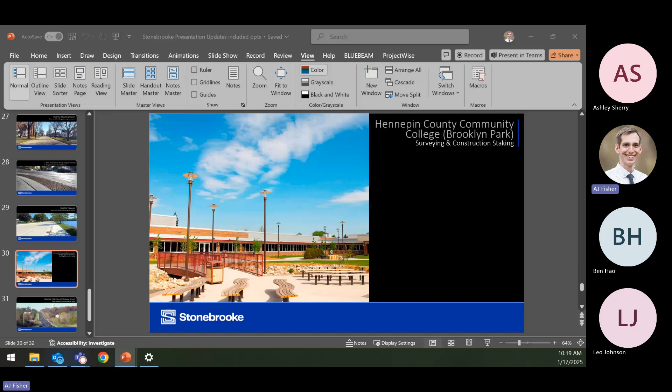We'll see if I can juggle this. All right, Nate Kabat is the Community Development Director for the City of Chaska. He has worked for the city for 9 years. Nate holds a master's degree in urban and regional planning from the University of Iowa and is AICP certified. Nate enjoys ice cream and tossing the tennis ball when his dog actually cooperates in a game of fetch.

Bob Meurer is a senior transportation engineer at Bolton and Menk. He has worked there for 4 years. His career is founded in multifaceted, complex construction projects, but has lately been managing projects through design and construction all over the metro area. Bob enjoys long books, long trails, and short lines at coffee shops.

Jake Bongard is a principal transportation engineer with Bolton and Menk. He began his career in 2009 and works on a variety of projects ranging from high-level planning studies to in-depth final design. Jake holds a Bachelor of Science in Civil Engineering from the University of North Dakota. Jake enjoys building forts with his kids and taking annual trips to the Boundary Waters.

Great, if you guys want to come up, you can take it away.

This mic's for the Teams meeting and this mic for... this is Teams, this is the room. Oh, I'm doing both. Yep.

Okay, is this working? Okay, so I'm Nate Kabat. I'm the Community Development Director for the City of Chaska. And I'll get us kicked off.

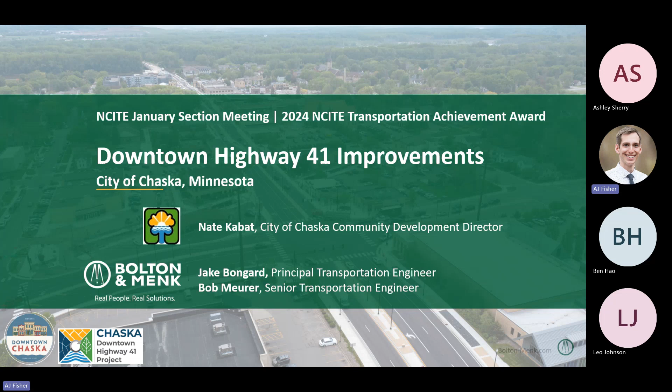So just to preview some of the things we're going to be discussing today, we'll go through the history of this project, the city's role and leadership, some issues and problems, and solutions. Bob has trained me through this project that for every problem there is a solution. We can be confident in that. We'll go through the funding, construction, and project accomplishments.

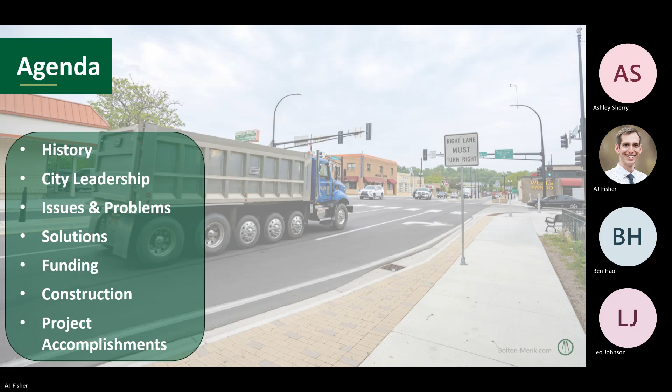I'll be here for the first section, and then I'll toss it over to these guys. So just to get you oriented to Chaska a little bit, there's quite a bit of history in the city. I don't know if you've ever been there before, but if you have, you would know that we have a pretty historic downtown. You can kind of follow transportation history and how that's developed along the Minnesota River.

Chaska was once a stop on the Minnesota River, serving as a port for grain primarily and other materials that need to happen. We're sort of a frontier outpost at that point, right? Carver County was organized in 1855. The first railroad bridge over the Minnesota was in St. Peter in 1869 - St. Peter's a little bit south of Chaska. City of Chaska was incorporated in 1891.

And then you can see here, there's some photos of 41 and how that has looked differently over the years. In the original plat for Chaska, 41 would have been Chestnut Street. There would have been no river crossing at that point in time, and it would have been a city street, right? And so that city street over time has become a MnDOT State Highway with a river crossing, which is a critical route in the connections that it serves, north-south, between Scott County and Carver County.

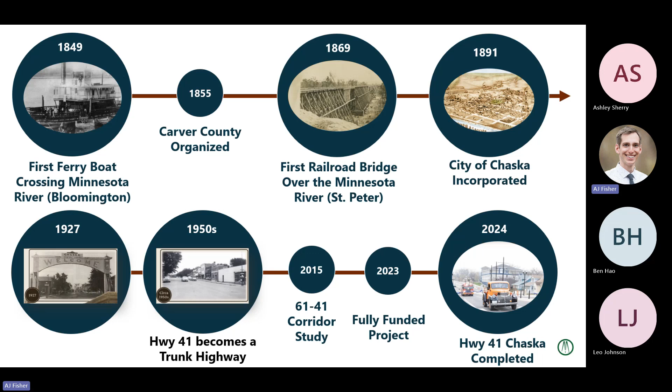So here you see the location of Chaska as it pertains to the metro. Yellow dot is showing where that is. You can see the crossing of 41 connects 169 up to 212 and Trunk Highway 5 and ultimately Trunk Highway 7.

And here, in Chaska, we talk about the 3 Gs that travel on Highway 41 frequently: grain, garbage, and gravel. On the south side of the river, you've got a DEMCON site where there's a lot of garbage going. You've also got gravel mines on the south side of the river that are coming northward to feed all the development going on. And then you've got the grain trying to access from farm locations in western Carver County and beyond over to the ports in Shakopee, where they thereby go to the world, right?

So you can see in Chaska, this is zoomed in to our downtown. You get the historic, traditional grid street system that was developed with the original plat. You've got Highway 41 that goes through the heart of downtown, which was really originally the main street of Chaska.

So you can begin to see some of that tension, right? MnDOT's got interest in getting vehicles through quickly and efficiently. We want people to come and get out of their cars and walk around and enjoy our downtown. And so you've got that kind of interesting

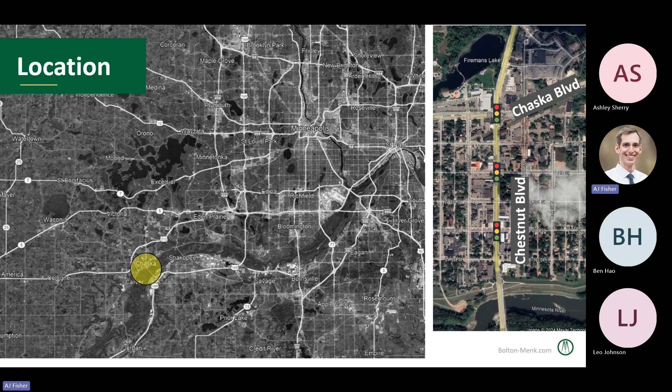But that's right off of 41. There's three burial mounds in that site, so it is by state statute a cemetery. And then on top of that, now we've built what we would call our historic park or city square. So there's all that kind of layering that's going on in downtown.

Downtown Chaska overview, I've given you a little bit of that already. I think some things to note, in addition to what I've mentioned, in 2012 there was a downtown master plan that was done. So downtown Chaska was built around the brick industry.

There's a lot of bricks actually in downtown Minneapolis, and also the State Capitol's foundation is built out of Chaska brick. And so that was clay that got mined out of Chaska. It was very industrial. Eventually that brick industry dried up.

And so, over the last few decades, we've been working on revamping and rebuilding and redeveloping and all that kind of thing. And what is that vision? There's a lot of scattered kind of work going on, and I think in the right direction.

But come 2012, people thought, you know what, maybe we better be a little bit more coordinated about this. So there was work that went into that, came up with a downtown master plan, identified some key investment areas and things that we wanted to see happen. And Highway 41, the spine of downtown, was definitely identified in that plan.

Trunk Highway 41 at the time, before this construction project happened, was two lanes going each way, no dedicated turn lanes. There's a lot of traffic hazards that came out of that. Not a great experience for pedestrians.

And so we recognized that Chaska needs to really take a lead here, put a priority on improvements to Highway 41, because everything kind of radiates out from that. So that was the 2012 Downtown Master Plan.

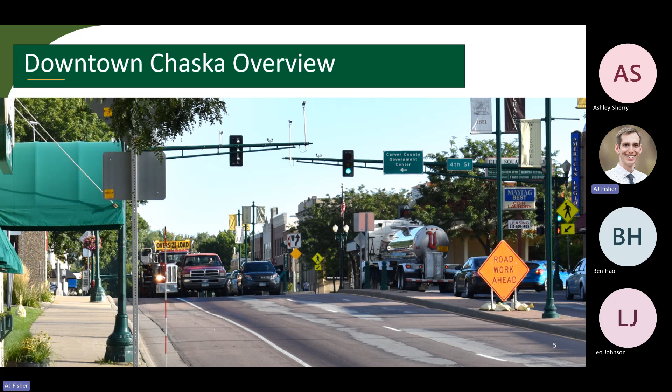So goals and perspectives. This is coming out of that downtown master plan and also some of the planning work that was done at the onset, led by Bolton and Menk: preserve and enrich the ambiance of historic downtown Chaska, provide a comprehensive network of non-motorized transportation, safely accommodate all users, so not just the traffic, but also the pedestrians.

Provide efficient and reliable vehicle mobility, so that's getting at the need for actually dedicated turn lanes. Provide infrastructure improvements compatible with the natural and human environment. Again, that's getting back towards, can we make this more pedestrian friendly? And develop a financially responsible implementation plan, which gets at how do we get other people to help pay for it.

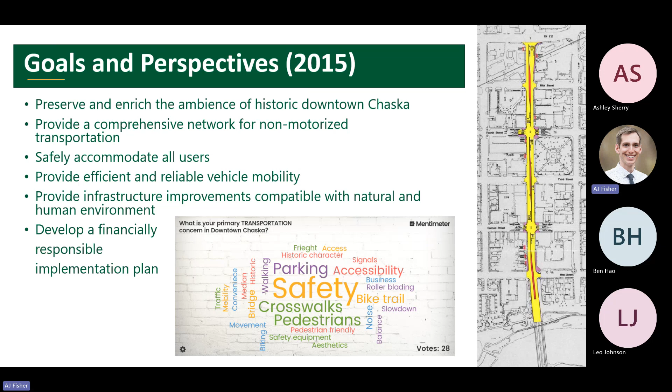So city leadership, I think it's fair to say that the city of Chaska took a very strong leadership role in this, definitely with the partnership of Carver County and MnDOT at our side. But to credit those folks, recognizing that the goals at hand here are really driven by the city and the local experience and what we're wanting to see with their downtown.

I won't say it was always easy. There were some very contentious meetings that occurred as we're trying to align the various purposes of a city versus MnDOT and the county in between. Everyone's got their own goals and strategies and needs that need to be met. But we were able to work through that.

And then even through implementation, and Bob's going to get into some of that, having the city at the lead of that with MnDOT and Carver County as partners, I think went a long way in being a little bit more boots on the ground and understanding those connections to the business community and the local residents that were going to be impacted through this, and how to best approach them and be able to anticipate likely scenarios.

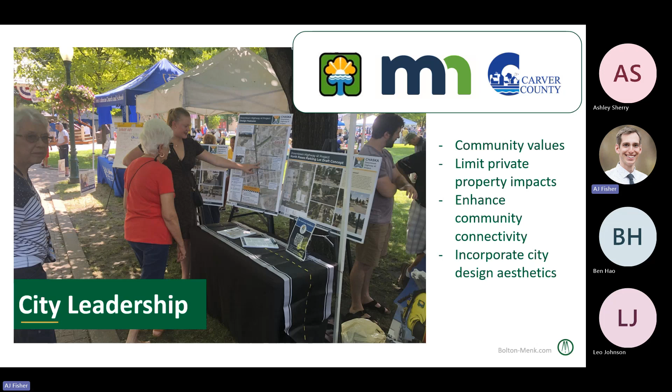So I was talking a bit about the partnerships. I think it's important to thank the folks that were involved in this project, provided leadership, and first and foremost, the Chaska Mayor and City Council for setting the vision and staying strong in the face of scrutiny of the project, and during the project to support the business community.

When we were trying to sell the idea that we're going to take 2 lanes in each direction and turn it into 1 through lane in each direction, that blew a lot of people's minds who live in Chaska, right? Who are traversing this corridor every day and going, how in the world are you going to get traffic that needs 2 lanes in each direction today and smush that into 1? Lo and behold, I think it's worked out pretty well, but it's a mental exercise, right? So there's a lot of scrutiny that comes through that. And to the city council's credit, they held strong to that vision.

MnDOT for engaging in the process, I think that deserves a lot of recognition, allowing for that conversation to happen and take what should have been, or what they thought would be, a mill and overlay, and turn that into a complete redesign of a state highway through a downtown. Carver County for being involved in the preliminary design, also a huge funding partner in the project.

Bolton and Menk for leading the design, the public engagement, and the environmental and archaeological documentation for the project, and implementation, fostering that construction project through and trying to minimize impacts to the business community. Stantec did a lot of design work on utilities, stormwater, and parking elements. HKGI did a lot of design work on the ultimate streetscaping and placemaking and helping those goals around pedestrian friendliness happen. Braun Intertech did a lot of work on the geotech and contaminated soil services.

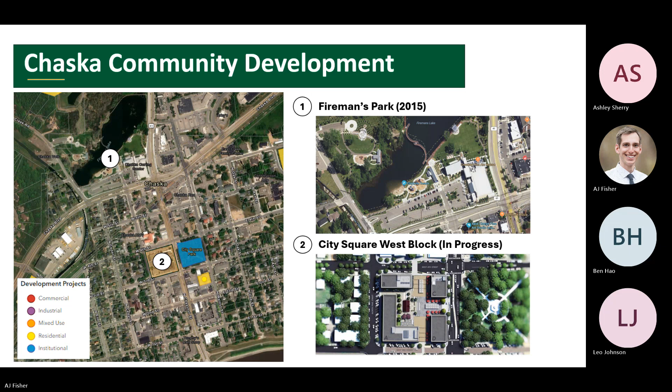And I think now we have a video. So - I just press play, is that how you say it?

So this is about a 7-minute video that provides a summary of the project. You'll see interviews with our mayor, our city administrator, some key folks at MnDOT and Carver County - I think Bolton and Menk gets presence in it too, I'm guessing. You'll see them talking about the process leading up to the project, through implementation, and the experience that went with that.

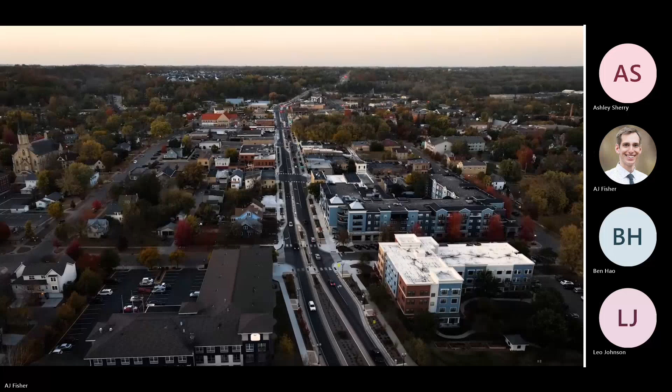All right, so I had the pleasure of starting on this project all the way from the study phase at the very beginning, closing in on 10 years ago now, and helping to foster it through preliminary and final design. But I think the since-retired city engineer put it perfectly - his goal at the beginning was to make sure everybody was equally unhappy with the result. He said that because he knew the complications here, the tight right of way, and how complicated it would be to find something that works for everybody.

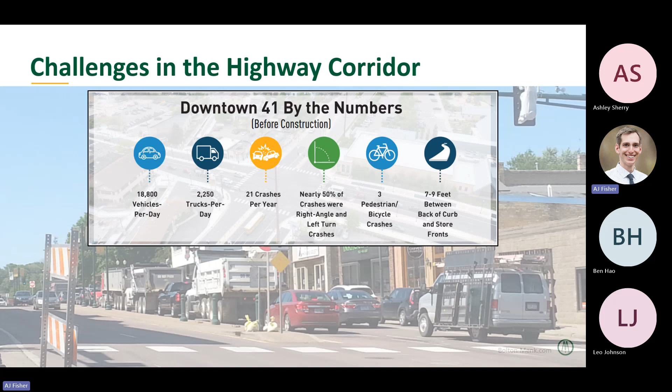And I think at the core, the thing to remember here is this is a downtown. As the mayor said, it's their main street. And with that comes a responsibility to provide local movement, safety, but also that regional connectivity that's needed here. So breaking this down into a few buckets, starting with the mobility piece.

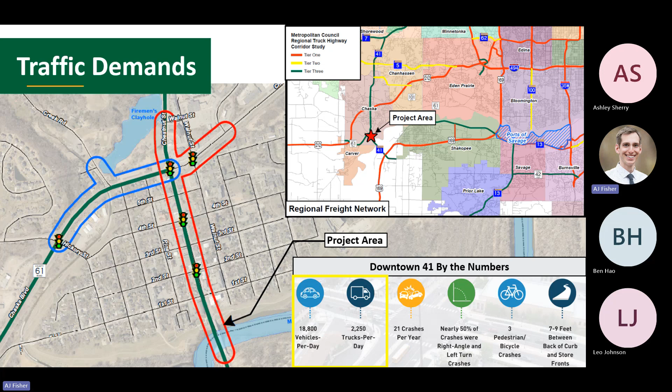Downtown Chaska, Highway 41, pushes through about 18 to 19,000 vehicles per day through a main street, through a city, through a downtown corridor. With that comes about 2,200 trucks per day, so about 12% trucks rolling through the corridor, stemming back to the 3 Gs that Nate mentioned: garbage, gravel, and grains. It's also a principal arterial, and it's on the MnDOT freight network as well.

From a crash perspective, there were a lot of issues before the project happened. The corridor averaged 21 crashes per year - that's about 80% higher than the statewide average for a typical corridor. And if you look at the typical section here, it's the standard 4-lane, divided/undivided, with no turn lanes - no left or right turn lanes.

So I am a Chaska resident. I worked in Burnsville for years, so I drove this corridor every day. There was kind of a game as you drove through, seeing how quickly you could get through the corridor. The inside lane was always a little quicker, but you knew if there was one left-turner that stopped in that inside lane, it just stopped traffic in that lane.

So everybody kind of slingshotted around in the outside lane, and it was just a big hodgepodge of weaving and merging and people just trying to get through the corridor. Speeds were high with people trying to navigate the corridor as quickly as they can. And crashes were there too. On average, it was about 5 or 6 right angle crashes a year, 4 left turn crashes, and a handful of side swipes as well.

The typical section that you see here has a center median, and on the southern side of it, there's the 2nd Street intersection with a traffic signal.

Unfortunately, there was a pedestrian fatality along the corridor in 2008, and from that stemmed a MnDOT project to make things better as best they could. They provided these improvements in 2010, but clearly there has still been some issues along the corridor with all the traffic being pushed through the 4-lane corridor that we have today. Over the recent years, there have been 3 pedestrian and bicycle crashes as well, so there was still an issue occurring throughout the corridor.

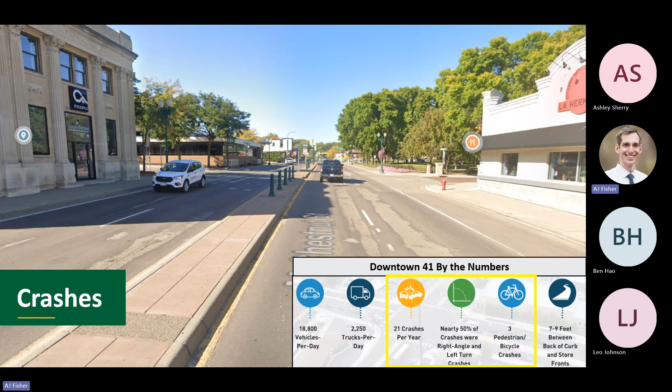The mid-block crossings were difficult too. If you look back here, there's one at 3rd Street—you can see it's barely a 6-foot median, not comfortable to stand in, again, with trucks rumbling by. So it just wasn't a great environment for people to get around.

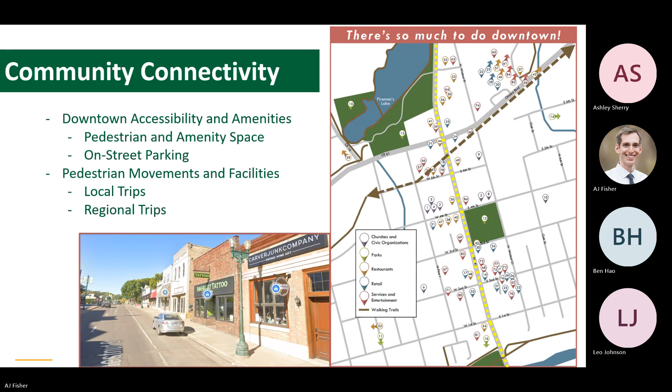Regionally, you can see the dash line here with the arrows. The Minnesota River Bluffs Trail tries to traverse here, or it's going to soon. There's a nice long trail system in Carver, the city to the west, and Chanhassen and Eden Prairie to the east also have a nice trail system, with a 2-mile gap in between. Locals have been trying to fill that gap, and a project is going to be completed later this year. But again, Highway 41 was just a huge barrier for the regional movements, or the longer range pedestrian and bike movements that wanted to occur here.

Getting into the solutions, we're able to see a lot of this in the video, but just highlighting some of the details. One interesting piece of this, from what we looked up, is that this is the first implementation of a road diet on a principal arterial roadway in the Twin Cities Metro.

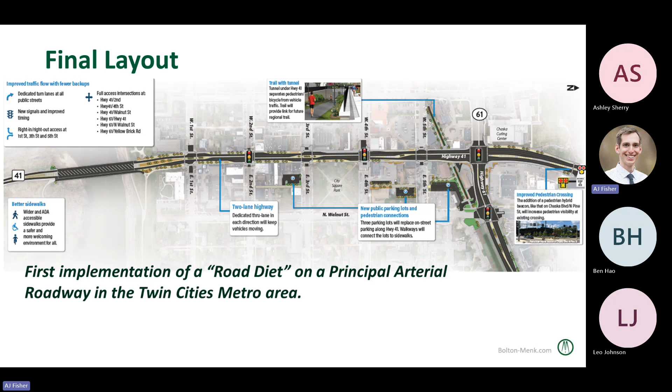It is a downtown corridor, but as the video showed, it was converted from a 4-lane to a 2-lane roadway with turn lanes at each intersection. So while we're reducing capacity essentially with 1 lane in each direction instead of 2, we're providing good long turn lanes for the left turners and little outlets for the right turns as well, just keeping traffic moving as best we can within this smaller environment.

I think the ped bike improvements are really highlighted by what you see here, and I think it's made a significant change in downtown. So, walking through each component of that, starting with the traffic calming element.

I don't know if you noticed, but when the drone flight was there on the far left side, number 1, there's a goal and an interest to extend downtown, or the feel of downtown, as far south as you can.

You're transitioning from a 50-mile-per-hour rural section essentially into a 30-mile-per-hour urban section downtown. So how do you start to introduce that as quickly as you can? Adding curb and gutter and kind of an outcropping of rocks in the center median to make it feel a little more uncomfortable. Not huge rocks, but just something to give a little presence, so you make it feel like you're leaving the rural section. That was implemented, and calming along with reducing the through lanes was a big deal.

You don't have people jockeying, trying to race through. You're stuck behind the person in front of you and you navigate it that way. Parking removal was a big thing as well, a big talking point for the business community. No one likes to lose parking right in front of their business, but it became a priority in reducing it from 4 lanes down to 2. That was a requirement of Met Council, to remove parking because you couldn't have people slowing to get into a parking spot or backing out of a stall if there's only a single lane of traffic.

So really supplementing that with city parking lots, and I'll show some graphics on that too. Pedestrian connections - just providing safer crossings. The 6-foot medians were expanded to anywhere from 12 to 15 feet, just to give people a better refuge in the middle. And then the uncontrolled crossing improvements benefited from that as well, along with the reduction of the multiple threat crash, just with the single lane in each direction.

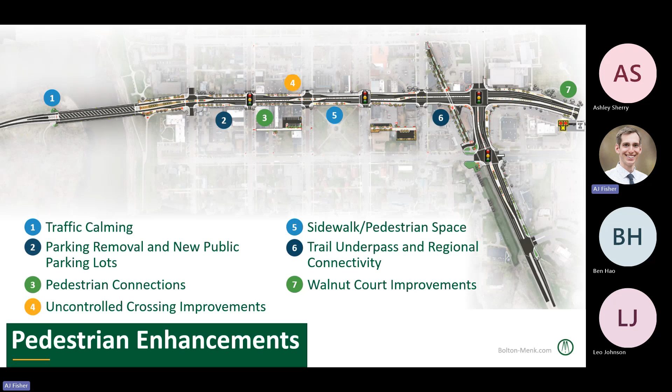So locally, I mentioned the Highway 41 parking being pushed off of the trunk highway. With that, the city knew that was a big deal to further accommodate, so they constructed city parking lots as part of this - general public parking that folks could park in and still visit the businesses. They're positioned throughout town along this corridor north-south: a parking lot on the south side, one in the middle, and one on the north side.

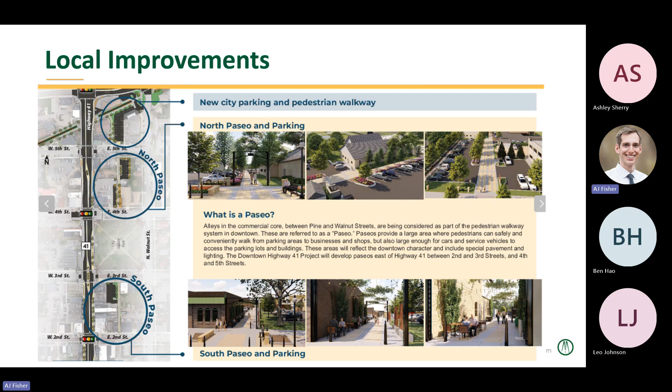They knew they just couldn't provide parking lots - they had to find a good way to get people to the businesses. So they installed paseos, kind of wide decorative walkways that vehicles can't drive on but pedestrians can use. It's a good opportunity for businesses to expand their reach outside and get people from the provided parking to each of these businesses. The goal was to still have public parking within 1 block of each business. We knew access would be shifting to the back of the stores in some instances, since the parking no longer fronts the buildings. So the city even went as far as providing grant funding to each of the businesses to dress up their back doors, to make it more inviting for people to access from these parking lots.

So just some street view or ground shots here. There's that existing 4-lane undivided section. I procrastinated a little, so you can see the lighting out here in this nighttime shot, but you can see there's a nice center wide median there. You can see the additional pedestrian space here and how that looks with 1 lane in each direction rather than 2.

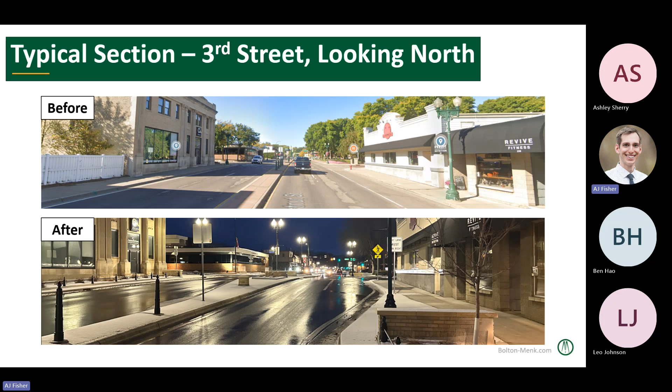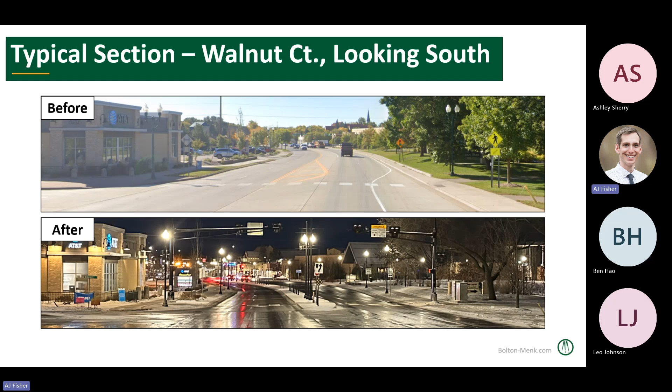A little difficult to see, but this is the pedestrian hybrid beacon on the north side of the corridor. The park's on the right here, but you can see how it changed. It was previously just a pavement - nobody crossed there, and if someone tried to, cars wouldn't stop for them. So this adds such a greater presence: a nice two-stage crossing with a 10-foot center median and the pedestrian hybrid beacon. It really changed the way people can access the park.

So yeah, all in all, just a good overview here of what the corridor looks like from an aerial view, as well as the underpass that was constructed as part of that regional trail system, just to help make that connection.

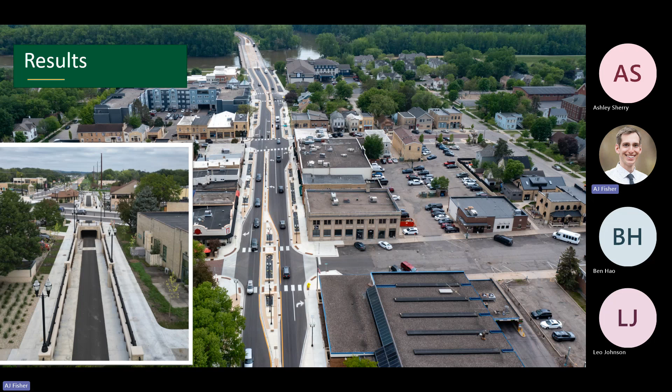So I'll turn it over to Bob here, if you want to hit on funding much or just move right into construction.

Morning, everyone. I'm a construction engineer by trade, kind of graduating into a bit more these days. My role on the project was liaison from the construction side. MnDOT was the primary construction administration - they did inspection and testing. We supplemented testing and inspection for some of the more city-centric elements, the utilities, the beautifying pieces. So I liaised between the city, MnDOT, and our design folks. That was my role, as well as providing some constructability input with my own background and experience.

I'm just going to touch on that one quick. My section here on the construction side is relatively visuals-centric, so if you can't see, feel free to get up - we're totally casual here, right?

So construction here, I'll talk about the goals. When I started on this project, I was called into the administrator's office and told, Bob, these are our main tenets for construction: ensure safety for all during construction - sounds straightforward, but in a downtown area that's a little different. Keep downtown open for business - Chaska in general is very business oriented, so it caters very hard to the businesses and their needs, from a deliveries perspective for access and keeping businesses open.

Anytime you reconstruct a downtown like this, the impacts are enormous, and we had to do that for a long time. It was really, really hard for businesses. So Chaska backed their businesses up saying, Bob, if you upset these businesses too much, we're going to be upset too. So businesses are a big deal.

Maintain traffic through as much as possible - that river bridge we keep seeing was a primary issue sometimes, but we kept traffic through there. Limiting truck traffic on 41 during construction - really we wanted to close that bridge, but only for a certain period of time, we'll get into that later. We couldn't allow trucks to come through, so differentiating from a traffic control perspective to allow cars to come through and use the rest of downtown.

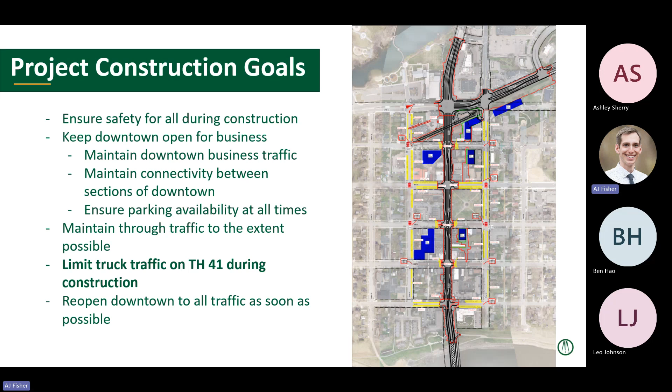I'll get back to this graphic in a little bit more detail so you guys can see it. So I'll talk about some of the construction challenges.

Nate mentioned that City Square Park is a burial site, and it is. That required cultural resource monitoring for a pretty large section of downtown, about 2 blocks plus those couple of parking lot areas. Thinking further about risk and managing that risk, if we ran into something, that could put the whole project on hiatus. But we did all of that.

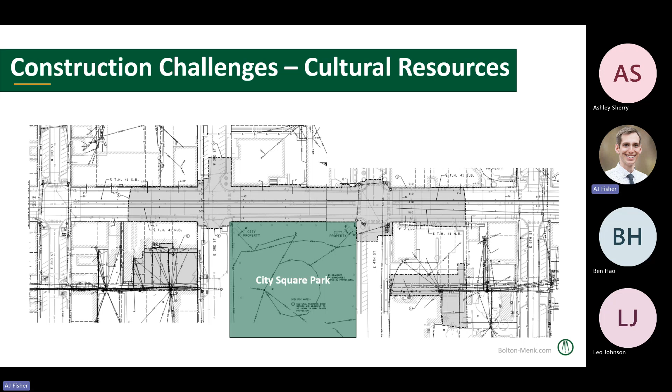Contaminated materials was another big one. Each of the red areas on here are probable sites for contamination. The yellows are medium, and obviously green is low. So that was a problem.

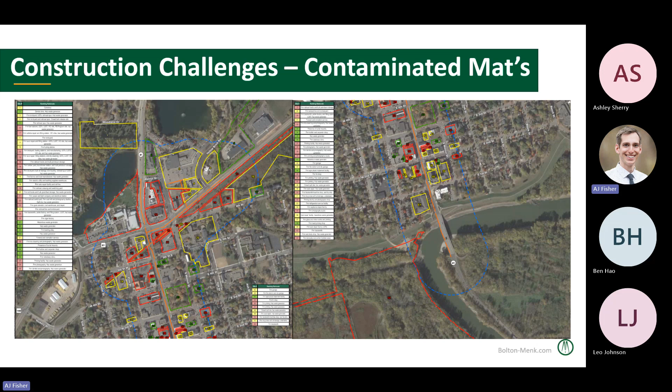We ran into a lot of stuff. There was an old rail corridor where the trail is now. If you've had any experience with rail corridors, there's a lot of contamination in there, largely clinker and all of that.

But we also had some groundwater issues as well. There was an old gas station on this Highway 61 and Walnut Street corner, so there's an underground plume there. And then there's a soil plume from 1988 that was groundwater contamination as well. There was a monitoring well in that location too, so we had to figure out how we were going to do this.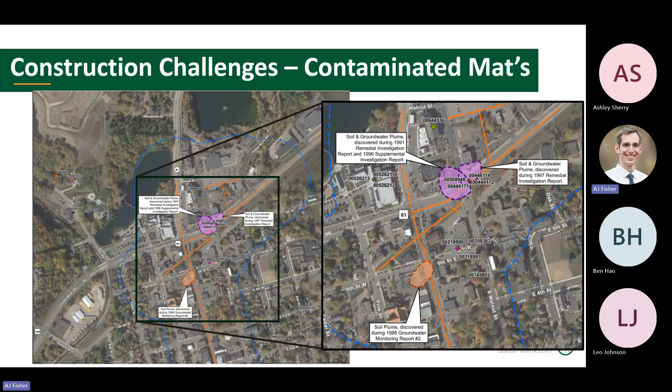Groundwater itself was a problem. This is the Minnesota River. During the spring this year, we had to shut the road down. This is after construction, this is this year, but this is the kind of thing that can happen.

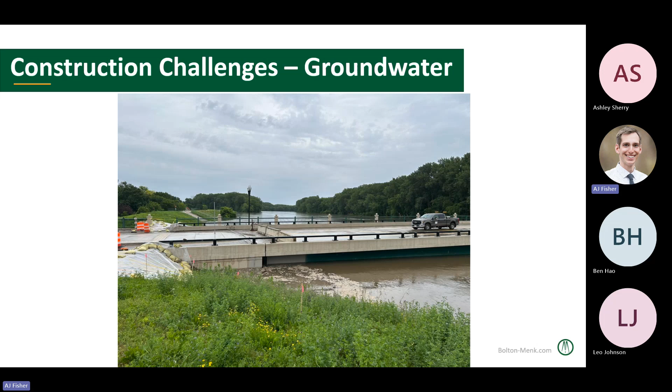I want to highlight that levee system we touched on a little bit earlier. There's a levee protecting pretty much all of downtown from flooding. You can see it on the left side of the screen, that mound. That bridge connects Shakopee to Chaska. This is the extent of what can happen - it happens relatively regularly. This wasn't our issue on the project, but it caused a lot of issues.

A little further on that levee system, you can see on the top graphic that red line outlining where that levee exists. On the graphic on the bottom, that portrays the top of that levee - I have a red line showing about the top elevation. And in the background of that photo, you can see our First Street intersection is pretty low down there.

Interestingly, Chaska also has that lake on the north side, so all of that groundwater goes to the river. Conversely, that river comes through the ground as well. When we're doing things like water main, that's 8 feet deep at that First Street intersection, we had to consider the ramifications of groundwater in that location.

What we did was some temporary wells in there, off alignment, and we were pumping groundwater out of there for about 2.5 weeks ahead of when we needed to do that. During water main installation it was just dry enough for us to do that, and backfilling with sand actually worked out pretty well. We had to go really, really fast though, and you'll see that in the staging section. Groundwater was a huge problem, coming from essentially both directions in that little hole where we had to do all of that.

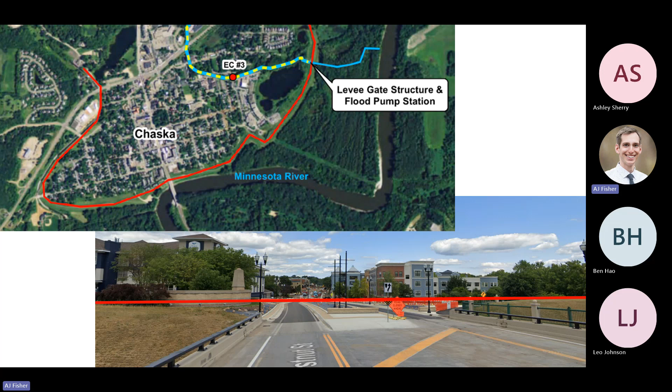Nate also touched on historic buildings. Each of these dots shows either currently listed or potentially listed historic buildings. Many of these are over 100 years old with masonry construction, so really, really susceptible to vibration.

We had a very extensive vibration monitoring plan, pretty much for the whole project duration. We increased our number of monitors, we decreased the number of monitors, we did real-time monitoring for some of that stuff. It was a big deal.

Anybody ever done this before? Vibration monitoring? Okay, yeah, it was a thing. It's big science, and I learned a lot about this - a lot of practical knowledge learned there.

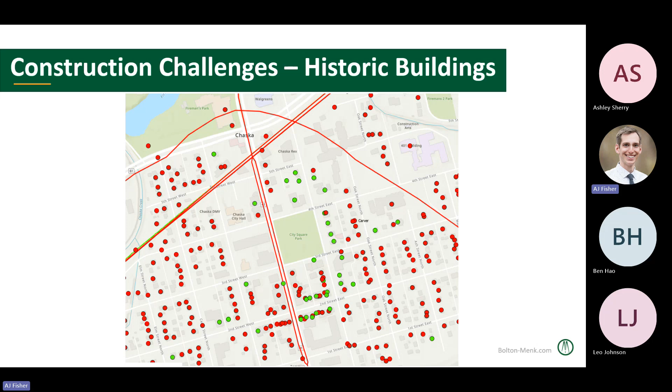Utilities were also an issue. Anytime you do any construction downtown, there's always utilities. This graphic shows the existing public utilities and proposed project utilities. Not to mention there's the existing and proposed private utilities, so essentially double all the lines shown here. For those of you in the engineering world, this all makes sense, but what I mean is that when you drive downtown, it all looks very nice, but underground it's a mess, like spaghetti underneath. So we talk about that a lot.

This was one of our main driving forces behind how we had to eventually stage the project. We didn't do quality level A utilities downtown, really because we didn't have time for them to relocate before our letting. Furthermore, if we would have relocated in time anyway, they would have had to shut down the road themselves to do that. So there was a collective decision to say, let's just try to deal with it during construction, with some nuance to that. I think that decision was probably right in the end, but it was a huge challenge, and the utilities really shaped how we had to approach construction.

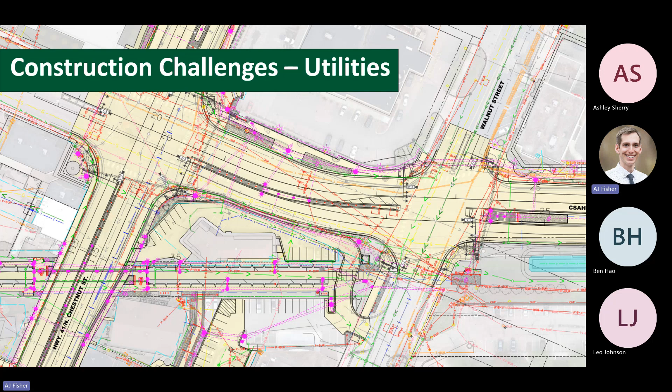So staging, I'll gloss over this because there's a lot of detail, but in a nutshell, we had to do 61 first in late 2022, and then we had to do 41 in 2023. That's the long and short of it. The parking lots we had to do before - at least the goal was to get them done before - so that when we removed parking on 41, people still had a place to park downtown. That's not really how it worked out.

What we actually did was much more complex. We still kept to the same idea and spirit of that staging plan. We still had that cyan, a 45-day closure for the intersection at 41 and 61 and the river bridge. The river bridge, again, was the primary southern to northern route into the city, and keeping in mind that goal of how we maintain traffic in the city for the businesses to keep going was a major issue. The underpass was a big issue. The utilities were largely shaped behind all of this.

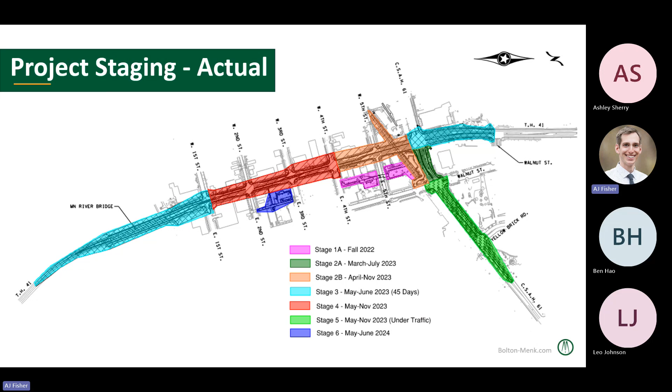That green section on the right, we had to do under traffic, and there are a lot of extra details here. Communicating this to the public, something that complex, was pretty difficult. We got really creative about how to portray this. Each of these stages has its own set duration, and we had to work with the contractor a lot about goal setting and how to structure the contract to hold them to all these things while still being vague enough, yet clear enough to the public, about if we are off by a week, what are the ramifications of that?

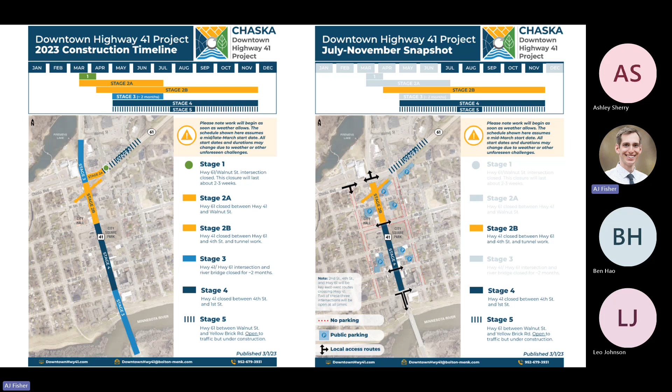You can see on the top there's a timeline about where those stages approximately are, and then what those stages are spatially in the map below, with some detail as well. The left side is a major overview of the whole project - we had a whole packet for this for the public. Each stage is broken out. Our main stages, if you will - stage 2B, stage 4, and stage 5 - are on the right here, where we still had to show cross traffic and all of that.

Zoomed in a little more, you can see where we had major crossings, also defining no parking. So you can see if we allow cars through downtown, where can they go? Cars can come up, but you have to take a right on First Street because the rest of 41 is all closed. If you wanted to get all the way through, you had to use Walnut on the right. Coming south, you had to come from 61 to use Pine Street on the left.

So it was a little bit confusing, but we tried to be pretty clear about it, and people pretty well figured it out. It's a grid system. Luckily, there's not any crazy nuance about routing or anything.

Going back to that first slide about considerations for where we could and couldn't park - if you have that same or approximately same amount of northbound traffic from 41 now utilizing essentially a local street, we decided to permit parking in some cases and prevent it in others. That was way more complex than it needed to be in the long run. We made pretty constant adjustments.

You can see those stop signs on the top - we added stop signs just to control things a little bit more.

When we had that hard closure of 41, there's slanted parking on all of our side roads. So in order to use some of that parking on the side roads, you had to close 1 or 2 or maybe sometimes even 3 of those stalls, so people could back out without going in the wrong direction. So maintaining that as much as possible was a primary thing.

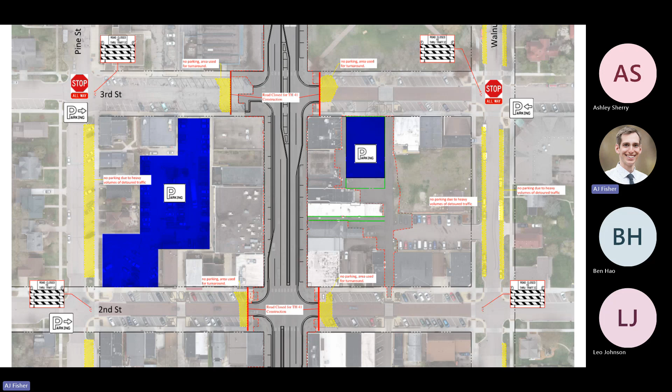We always showed parking on this, going back. We showed parking on these as well, making sure that people knew where they could go to park.

We employed a kind of business/community liaison. It was essentially on call for anything the public needed downtown - general questions about construction, coordination. We had water main and sanitary connections for all buildings downtown, so coordinating shutdowns with the contractor and bringing in the right people at the right time for the right business or entity.

We had to coordinate with owners and their tenants, since many times owners don't communicate with their tenants very often. Garbage was another big one - working with the garbage company about how to get all of their refuse out, and also with the tenants themselves about where to put it.

We handled general project questions, and on the bottom I have venting, which happened a lot. We had a lot of venting sessions, I think, on both sides during construction.

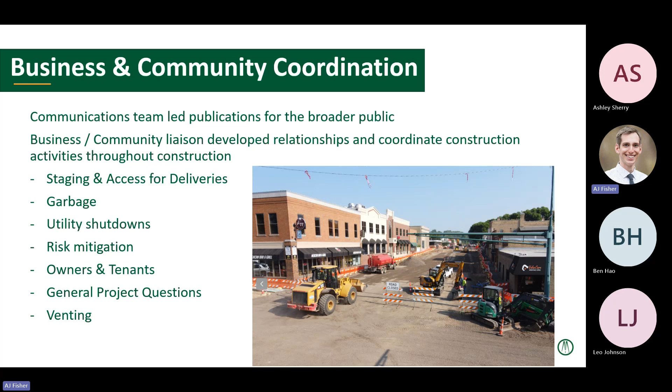So we were pretty much forced to do either soldier piles or sheet piles or some combination of both. Sheet piles ended up being the most economical.

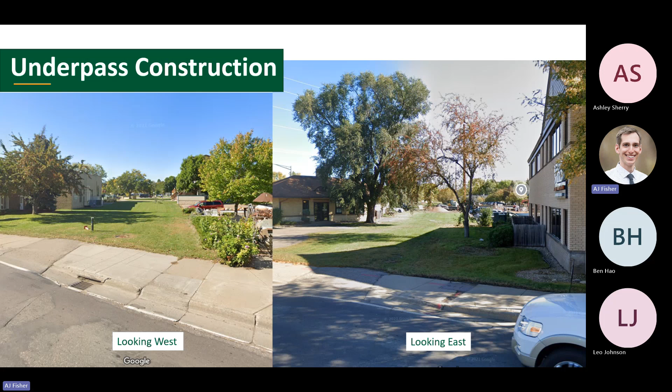For folks who have managed projects before, that underpass on 41 on a trunk highway has its own set of parameters that were difficult. Immediately under this, all of the soils were cobbly and gross - it was just a mess underground. But this was the goal.

I touched on vibration monitoring as well. Being this close to historic buildings was a big deal - anytime you pound sheets, there's obviously a lot of vibration that occurs.

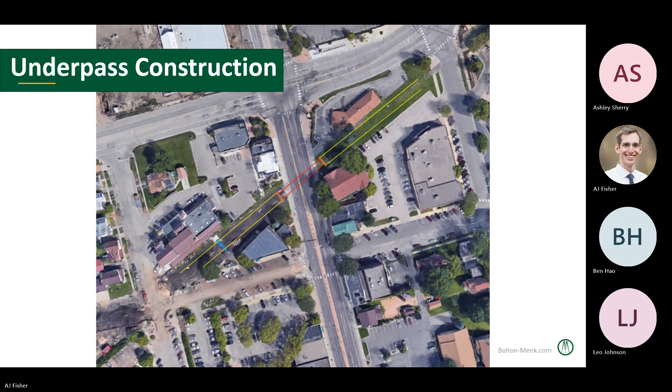There's different methods of pile driving. We had traditional pile hammers, we tried vibration methods of getting the sheet piles in, we had specialized pile driving equipment as well just to reduce that vibration, and we looked at a hydraulic press-in method for those. We looked at everything - sheet piling is really, really hard.

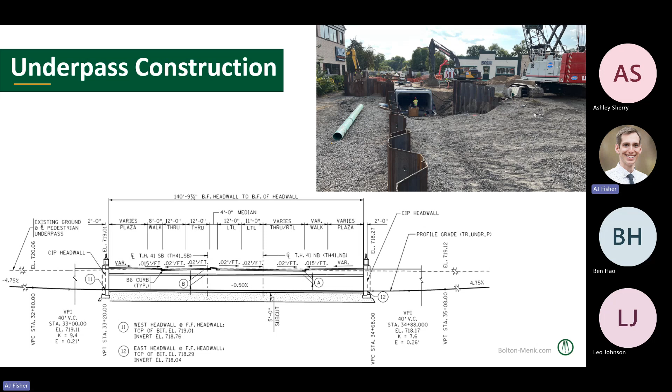I mentioned underground, there was a lot of mess and just kind of things underground. If anybody's ever pounded sheet piles before, it's a crapshoot. You don't really know until you start getting into it what you're gonna find.

Now, thinking a little more practically from what we experienced - we're trying to manage vibration, we're trying to get all these sheets in. But say on the fourth sheet on the left side, it hangs up at like 20 feet rather than the 60 feet. What do you do? Well, we didn't really know either.

We conjectured a lot with our structural engineers about what if this happens, then what do we do to mitigate that risk ahead of doing all of this? What if it was sheets 4, 6, and 8 all hung up at 20 feet, but all the rest went home? Was that sufficient from a structural perspective to call it good? We didn't really know, so we had to just get there and figure it out in real time.

What if we got one wall in, but the other had hangups? Now what, you just cut it off and leave it? There's not a lot of options there. So from a risk perspective, this was pretty high up there, not only from a vibration perspective, but as far as a fallback routine, we didn't really have any other options.

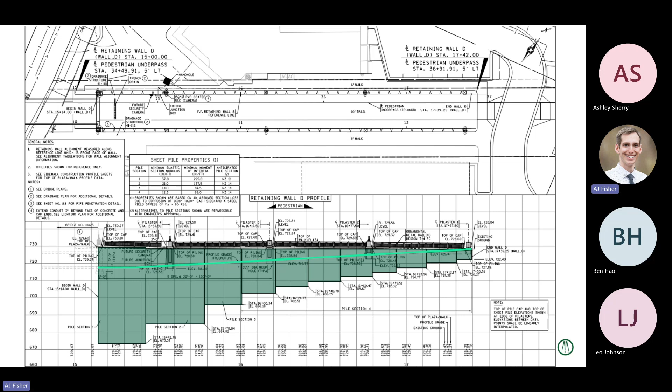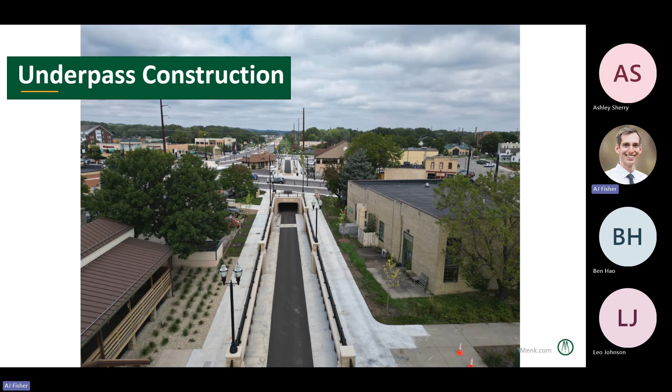I think that's all my thoughts on this one. We added pilasters to decorate the thing, and lighting and all that stuff too. Turned out pretty sweet in the end, but a lot of stress getting there, I guess. I would recommend using it. We're going to be done with that trail probably this summer, so that'll be nice.

Again, like Jake said, this is one of the first road diets in the metro. There was a lot of skepticism, even amongst the public. We got a lot of comments through our community liaison saying this isn't going to work, and we had a lot of outreach ahead of time to gather those opinions. But to the folks I was sitting with, letting your numbers speak for you ended up being correct. So good work, traffic engineers.

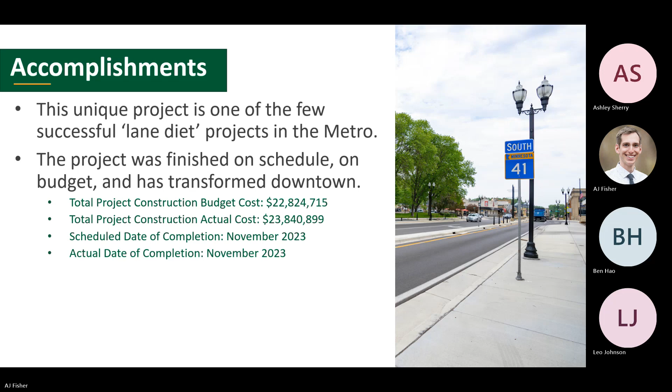Our construction was pretty close to what we were projecting, and despite all of the challenges, we finished on time and right around the budget. We had a cute little ribbon cutting. I'm not a big accolades guy, but this was a big deal for the community, and there were a lot of detractors through construction that are in that crowd today - we're all happy it's finally done. So in the end, everybody was pretty happy. That's what I got.

How are we doing on time? Okay, no questions then. Sounds good.